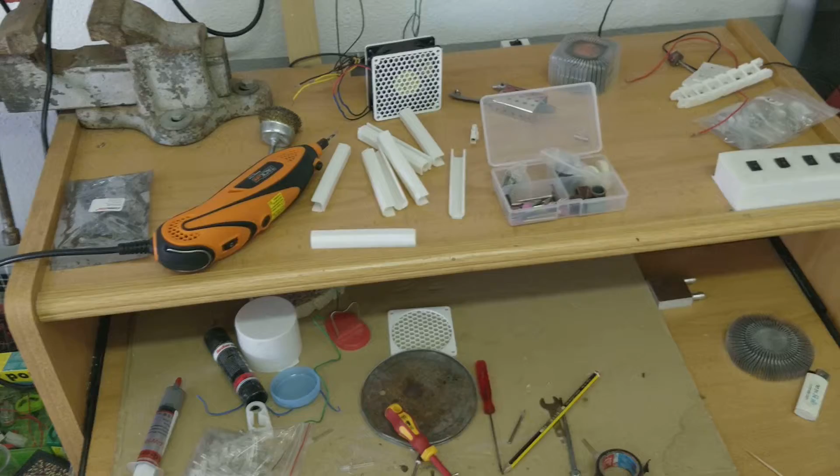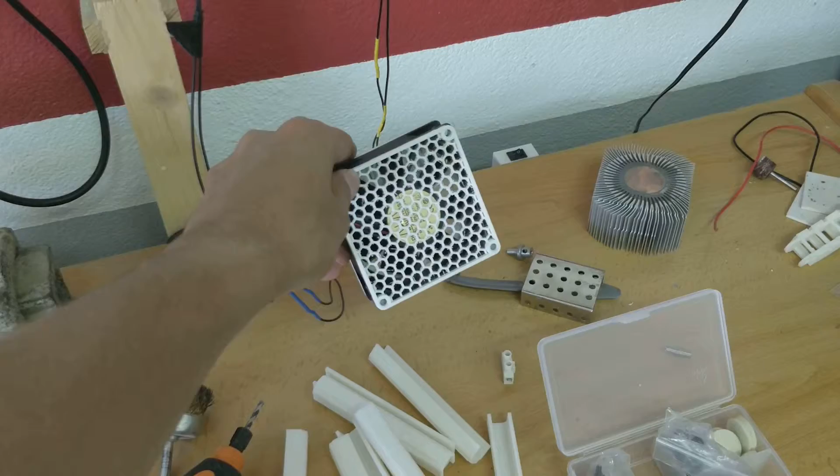And this is my table where I make everything. These guides here are 3D printed guides with PLA, and they're 10 centimeters long. What I want to do with this is to make holes through here and put RGB LEDs to illuminate my room. And here is a drill with the other things to put in the drill. And I have this fan which I use to blow away the smoke that is produced when I solder some stuff.

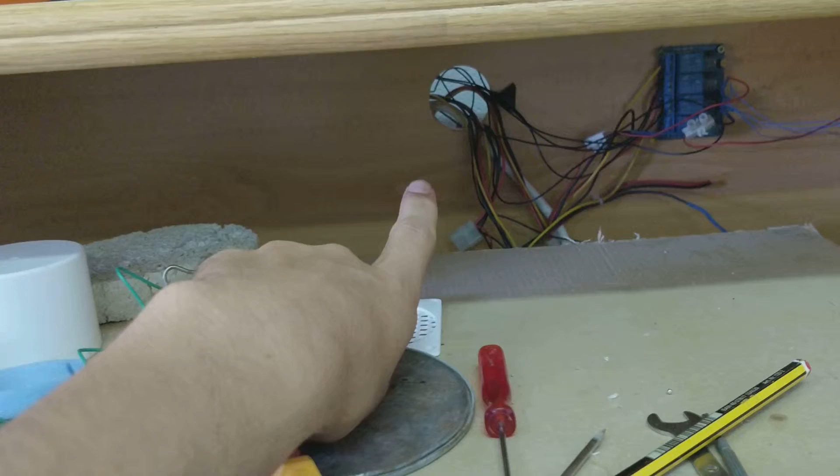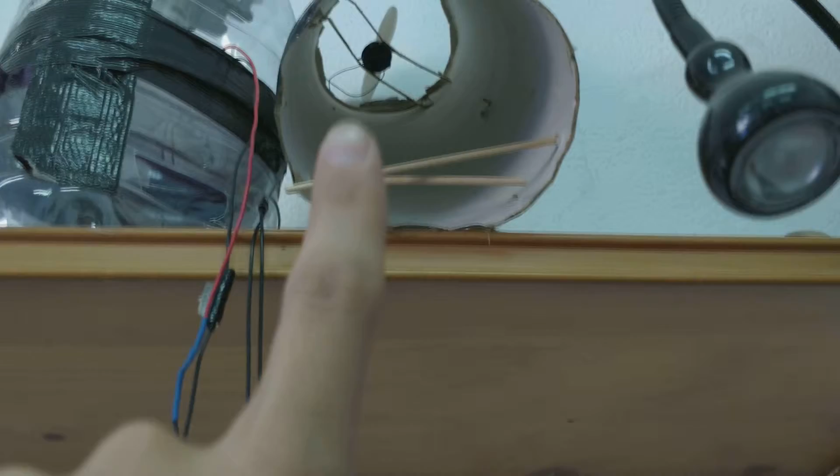And down here, on the other side of the wood where these cables come from, I have a power supply, a computer power supply plugged into these 4 relays, with the cables connected to the switches here, which control the fan. Inside here there is a motor with a fan with a helix, I don't know the name in English. And this vacuum, which I use to clean all the dust.

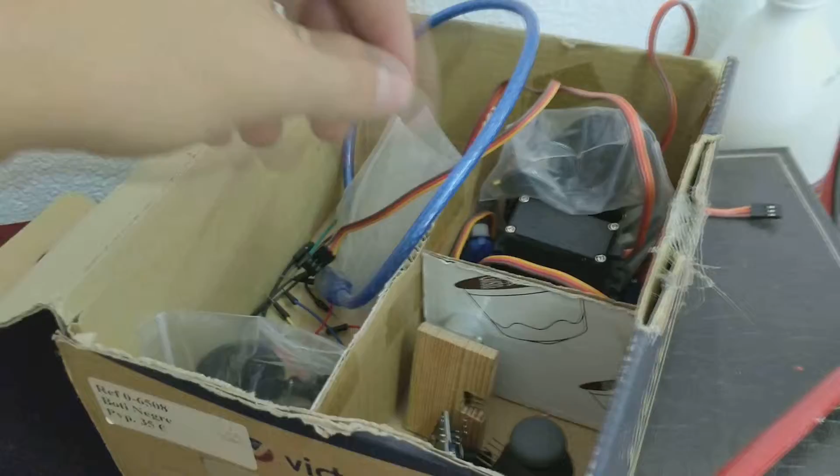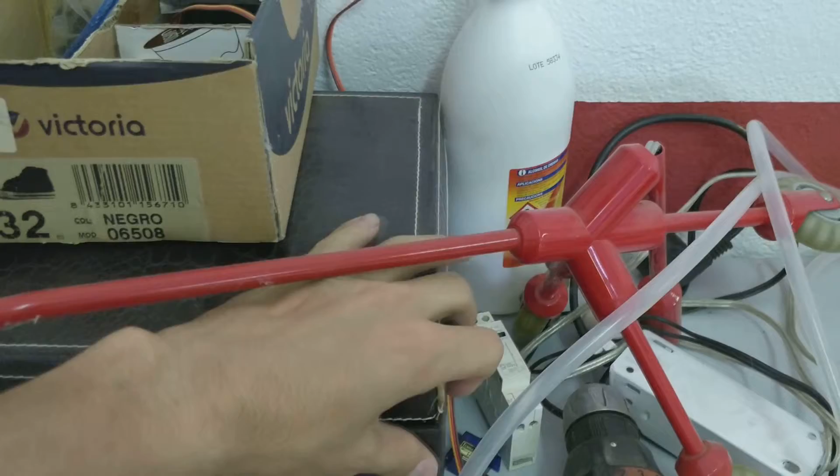And let's go on. In this shelf is where I save all the things that I need, the tools and some of the projects. Inside those boxes I have some Arduino sensors, some cables and some servos that I want to use in future to make a robotic arm, and some DC motors and stuff. And inside here I have a radio controller, some servos and some stuff that I recycled from a radio controlled airplane.

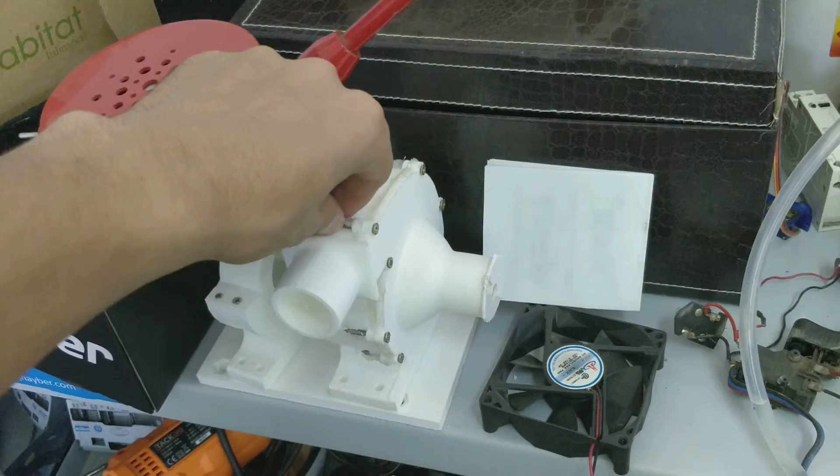This is a failed water pump that I tried to print, but it has a lot of leaks, so I decided to buy a new one from AliExpress. This is the biggest project that I have right now. I want to make an air conditioner for my room. The idea is to use these Peltier cells, which when you apply tension to them, one side gives heat and the other side gives cold. It transfers the heat from one side to the other.

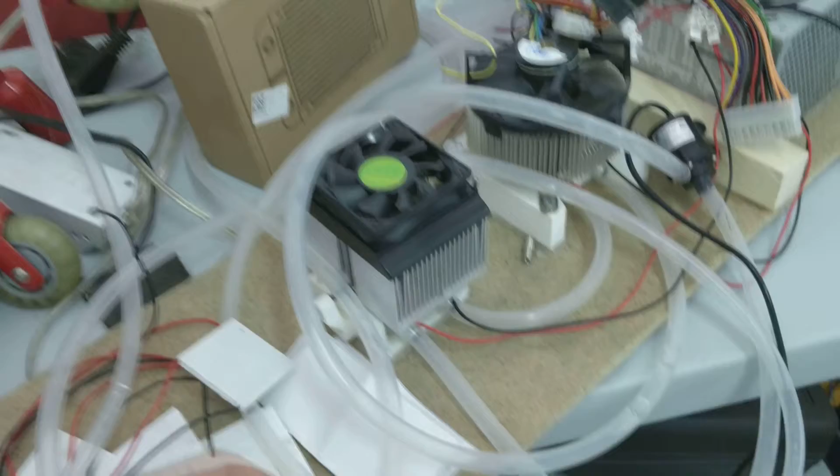So with these dissipators here, I throw away all the heat from the water that will go through these tubes to the air, and all the water will be cold. And with this radiator right here, I will throw all the fresh air to my room and hopefully cool it down a little bit, because it's very hot where I live. I will explain later with the 3D model all the specifications. And now let's go to where I have the 3D printer.

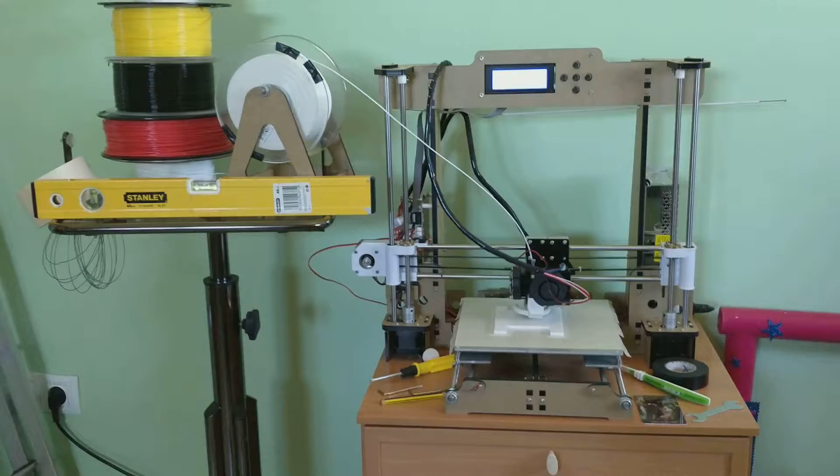Okay, so this is my 3D printer. It's the Anet A8. It's a cheap printer, between 150 and 200 euros, depending on where you buy it and the day, if there's any sale. It came totally unmounted, and it took me like 2 afternoons to put all the parts together, and it works pretty well for the price. The prints have a good quality, but the calibration is a little difficult to do.

And thanks to this printer, I can do a lot of stuff, like the air conditioner that I showed you before, and all the RGB strips that I have printed. Now it's printing a bracket for the dissipator that I will put in the air conditioner. And I'll show you my idea with the air conditioner in the 3D model.

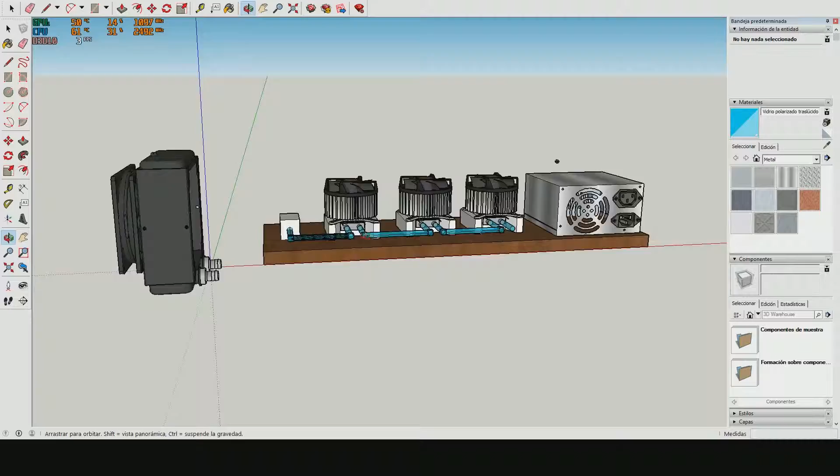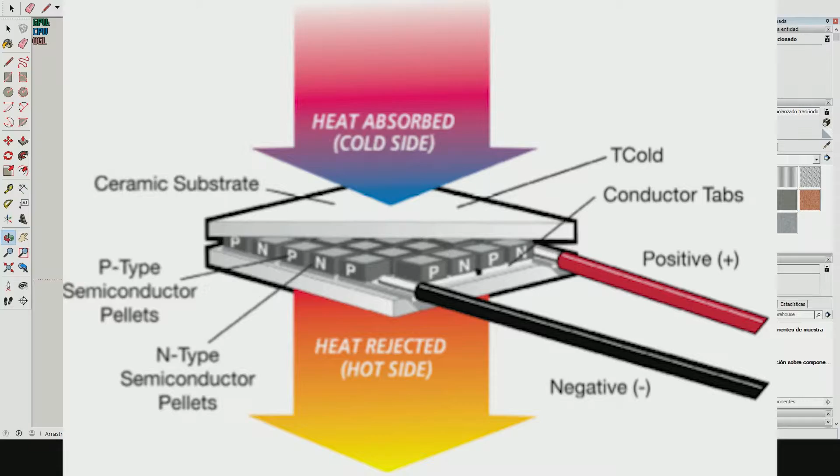Okay, so this is the 3D model, and I will explain the Peltier effect and how I will use it. For the Peltier effect, I put an image I found on Google. When you apply current through the cell, on one side it absorbs heat, which is the cold side, and on the other side it rejects heat, which is the hot side. So what I am doing here is putting the cold side facing the water block, and the hot side facing the dissipators.

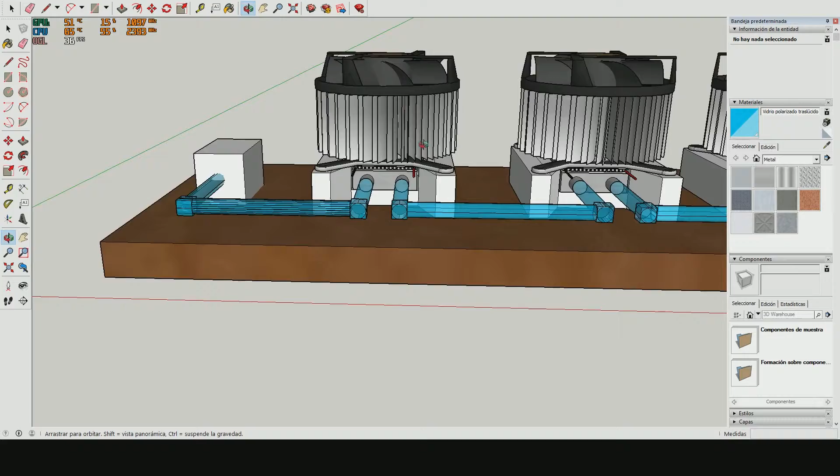So the heat goes away through the air, and the cold goes away through the water, and the water goes through the pump and to a deposit that I will make too. It's not drawn here because it's just a bottle. Then it goes through the dissipator that will throw the cold to the room, and with that I will cool the room and maybe the computer, but the idea is to cool my room.

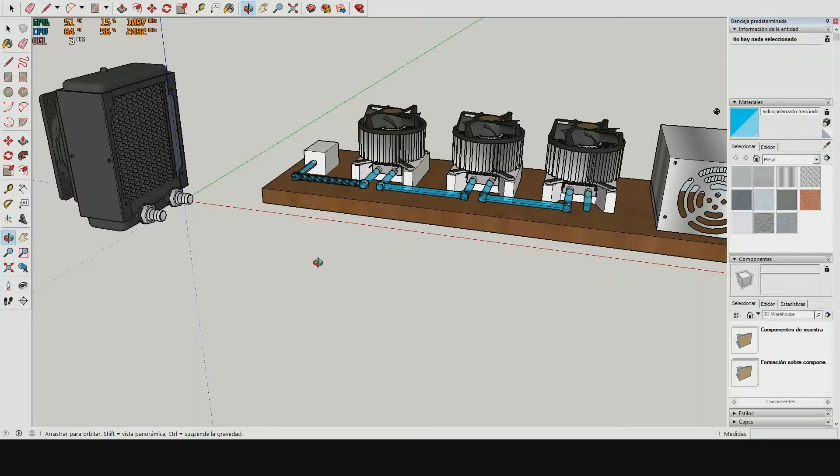So this is everything. In the next video I'll put the update. Probably I will only do it with two parts, because I don't have three dissipators that can work properly.